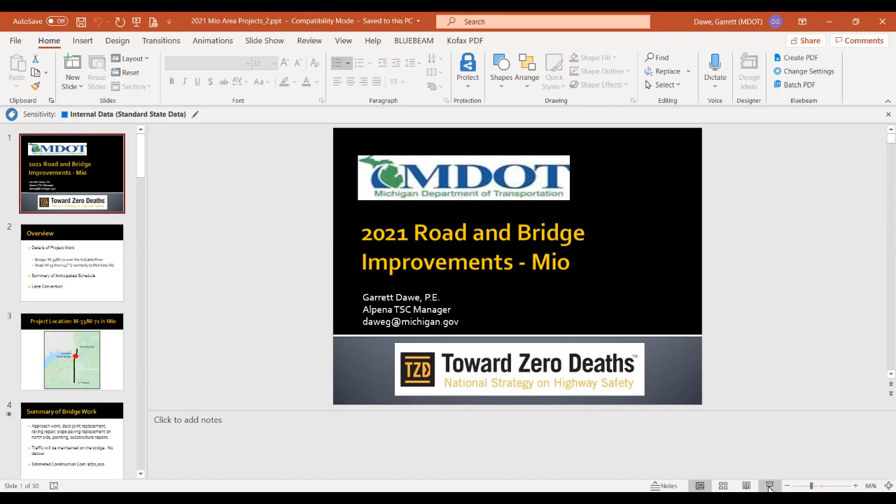Today's presentation is to give some information regarding a 2021 road and bridge improvement project in the Mio area. Again, I'm Garrett Dawe, the Alpena TSC manager. So here's an overview of today's presentation.

First and foremost, we'll go through some details of the project work. The bridge work is M33/M72 over the AuSable River. For the road work, we're talking about M33 from 14th Street at the south end of Mio, northerly to McKinley Road at the north end of Mio, which butts up to the project we completed in 2019 to the north. We'll also go over a summary of our anticipated schedule, and introduce a lane conversion concept we'd like to include in the project.

To highlight the project location, here's an overview map of the Mio area. The black line represents the limits of the road work, from 14th Street at the south end, northerly to McKinley Road. The red circle is the AuSable River Bridge where M33 goes over it.

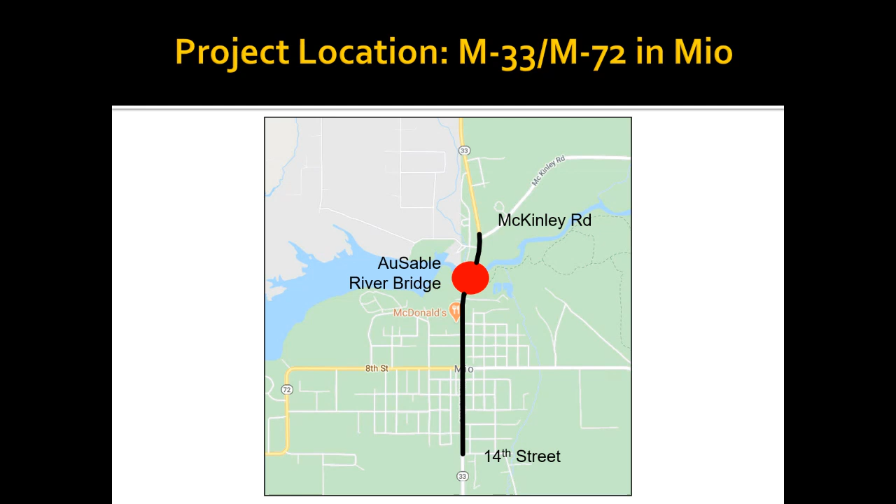We're going to start with the bridge work and give a summary of what MDOT will be doing on the bridge itself over the next year. I'll show some pictures of these things too, since some folks listening may not understand what some of these terms mean.

We'll be doing approach work - essentially concrete slabs on either side of the bridge deck on the road surface - deck joint replacements, railing repair, and some slope paving replacement. Slope paving refers to the concrete slabs underneath the bridge on either end that slope down towards the river. We'll replace that on the north side, paint the bridge underneath to help prevent rusting and deterioration, and perform some miscellaneous substructure repairs.

While we're working on the bridge, traffic will be maintained on the bridge, so we are not proposing a detour with this project. I'll get into more detail on what that traffic situation will look like. The estimated construction cost for this bridge work is $870,000.

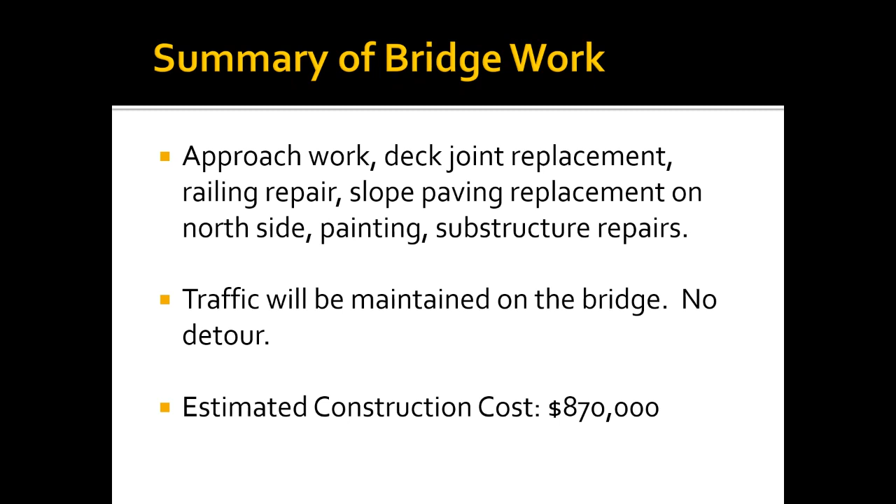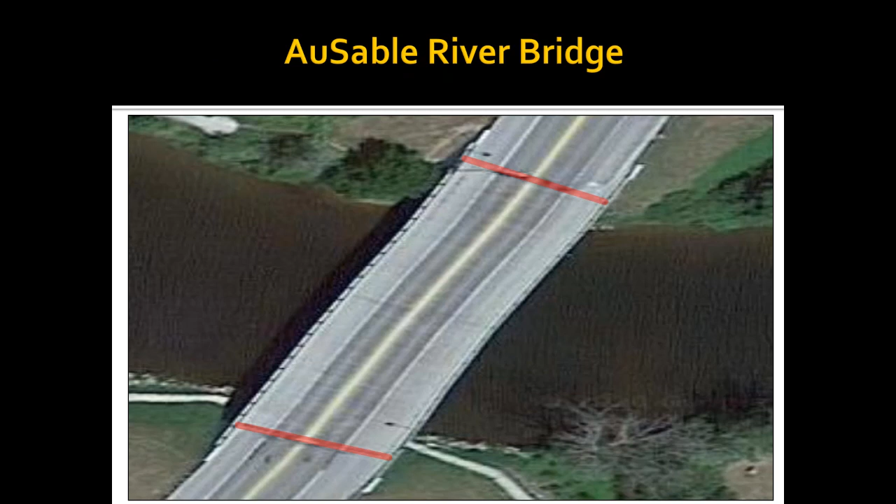Here's an aerial of the bridge over the AuSable River. Up on your screen is north, so Mio is off to the south, or the bottom of the screen. These red lines represent the deck joints. If you're familiar with, say, the Mackinac Bridge, and drive over those joints that look like fingers connecting - those are called expansion joints, and they allow the bridge to contract and expand with temperature without cracking or causing issues.

These joints will be replaced with the project, along with approach slabs leading up to the bridge. We don't have slabs there right now, but we're putting them in because they help, especially with heavier vehicles or trucks approaching the bridge. These slabs give them a chance to essentially settle down before they get onto the bridge deck, so they're not pounding on those joints or the bridge deck itself.

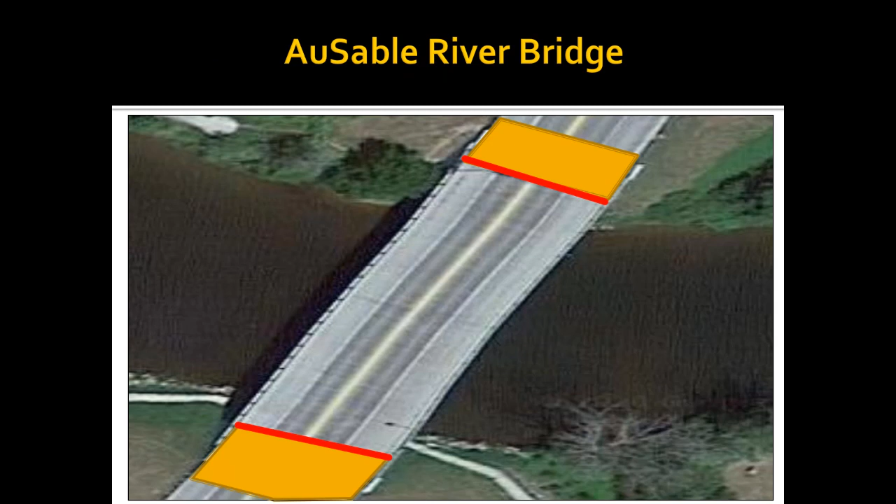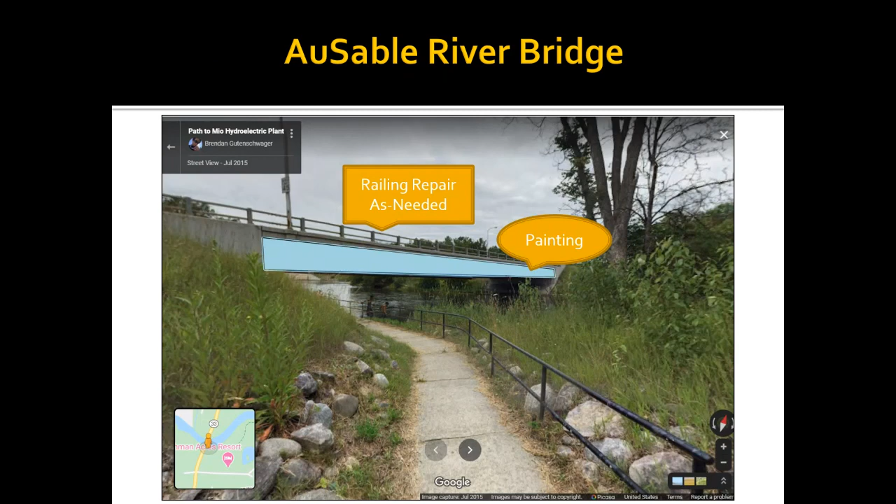Here's a picture of underneath the bridge, to give you an idea of some of the things we'll be doing. We will be repairing this railing as needed, so the whole thing won't be replaced, but any area that is damaged or deteriorating more than others will be repaired. We'll be painting the beams and other components beneath the bridge essentially the same color as it is now.

Again, that slope paving at the north side of the bridge, we'll be replacing, and putting back what we call heavy riprap - really boulders and bigger stones. Having that instead of the slope paving really helps us with scour around the bridge. If you picture the water moving along the bridge, it tends to erode less with the heavy riprap versus the slope paving.

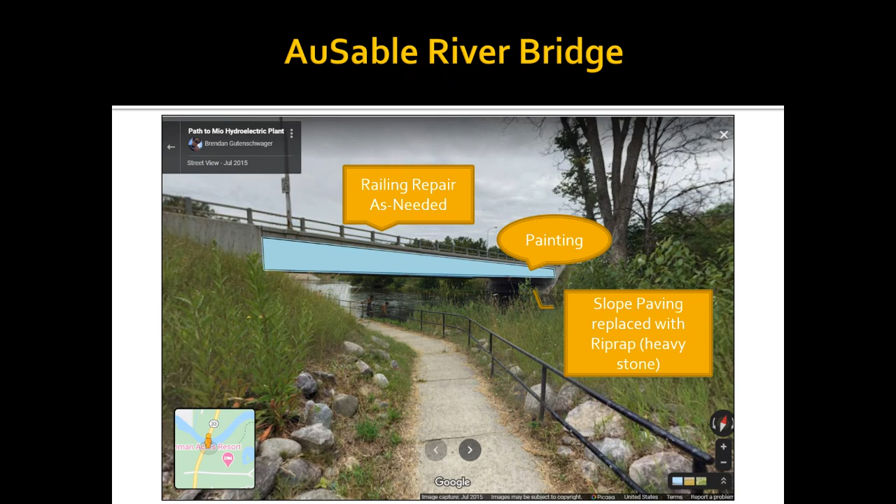Some substructure repairs are also needed. One thing I wanted to show - there's a pathway that goes under the south side of the bridge. Because of the work we're doing under there, it would not be safe for someone to walk underneath the bridge and through the work area. So we'll be closing this path on either end of the bridge during the project. Of course, the path will remain open up to the bridge itself for anyone interested in walking along it.

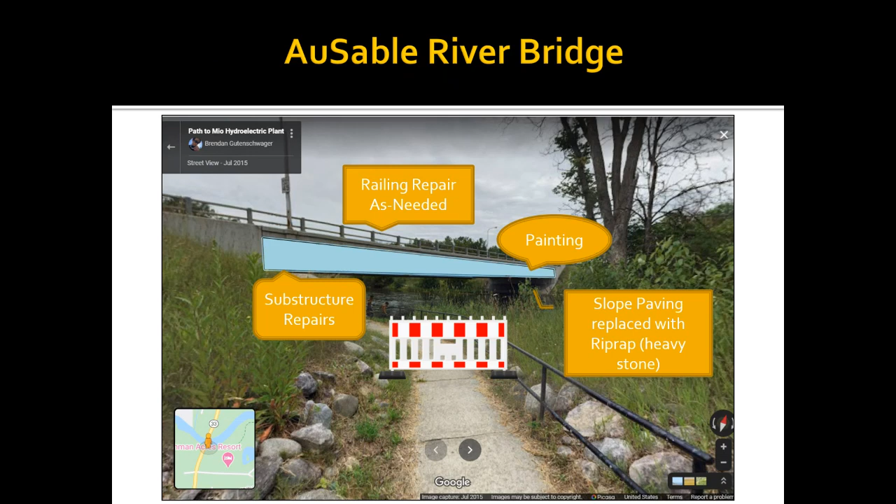So just detailing what the traffic setup will look like during the project. Beginning in late April through the end of June, you're going to see a single lane closure up top, with traffic maintained in one lane for both directions and alternated with temporary traffic signals on either end. This is a pretty common setup for a bridge lane closure. The side of the bridge that's closed will alternate, one side and then the other, to facilitate the work.

In the river itself, because of some of the work we're doing down there, it will necessitate closing off roughly half of the river stream to boating or other pedestrian traffic underneath. The channel will still be open, and we understand that the majority of river traffic is getting in just downstream of this location at the DNR park, so hopefully this wouldn't hamper anyone too much. The river will be open as well as the road.

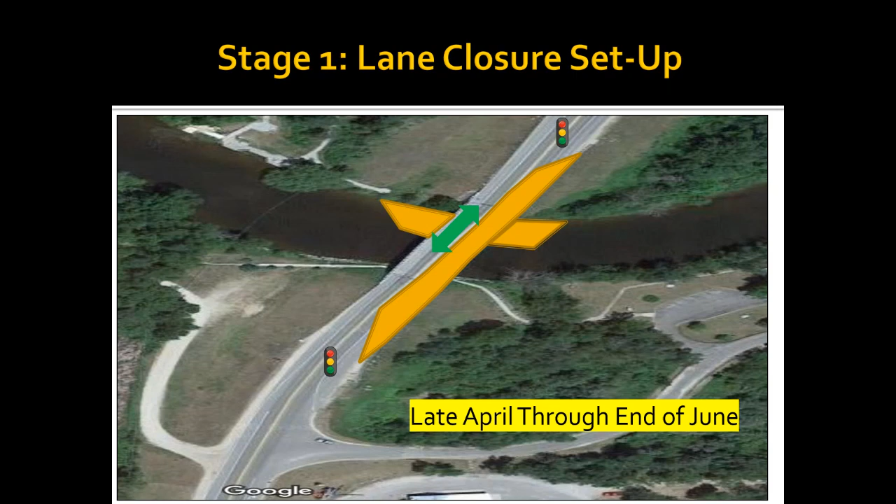The second stage of the bridge work will occur from the end of June through mid-July. All that's really required up top is a shoulder closure, which will still allow us to maintain one lane in each direction. So really very minimal impact to traffic from the beginning of July on. However, because the work underneath requires the shoulder closure essentially to park vehicles, we will still have the river closed part width, allowing traffic through, but not the whole width.

We will have all of the work done on the bridge and within the river before the canoe marathon weekend, which is the last full weekend in July, so folks either paddling in that race or watching it will not have to contend with construction.

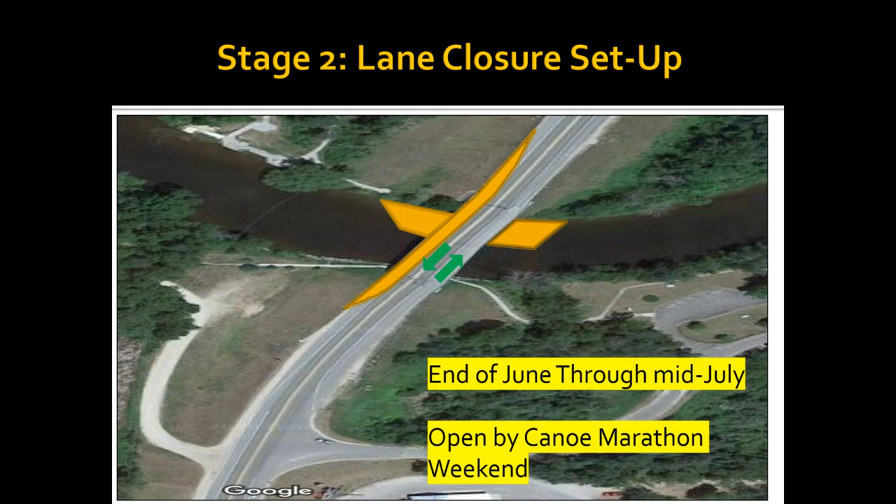Moving on to the road work, to reiterate, the limits of the road work are 14th Street at the south end northerly to McKinley Road. We have two different types of road work happening. In the M33 and M72 intersection area, we actually have concrete pavement, so we're not replacing the concrete, but essentially sawing out and resealing all of the concrete joints, and doing some minor pavement repairs in areas that have deteriorated faster than others.

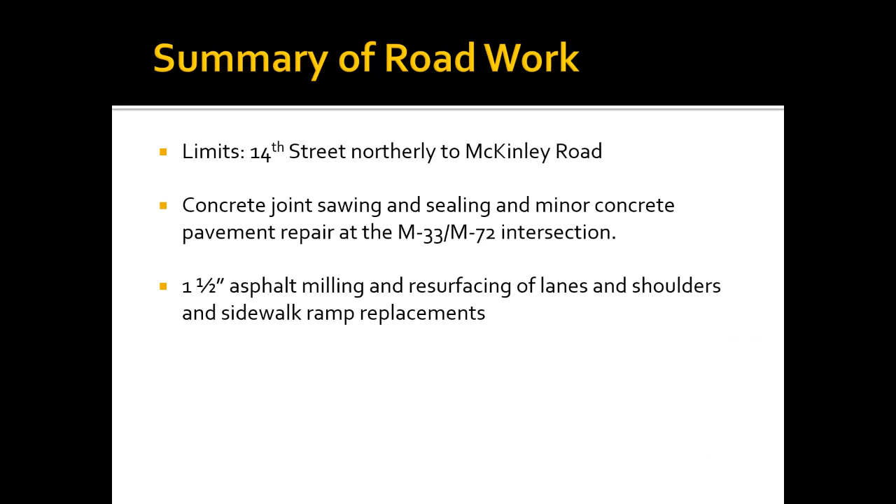For the rest of the road, which is asphalt pavement, we'll be doing a mill and fill, or mill and resurface, where we remove essentially an inch and a half of the top of the pavement and repave it back in, across the entire width of the road including lanes and shoulders. Along with that, we'll be replacing sidewalk ramps, which we're required to do when repaving a road as part of the Americans with Disabilities Act.

For the road work, traffic will be maintained on the road, again no detours, with intermittent lane and shoulder closures to facilitate that work. An estimated cost for the road work is $935,000. So all in all, between the two projects, we're right around $1.7 to $1.8 million—a substantial investment in the area.

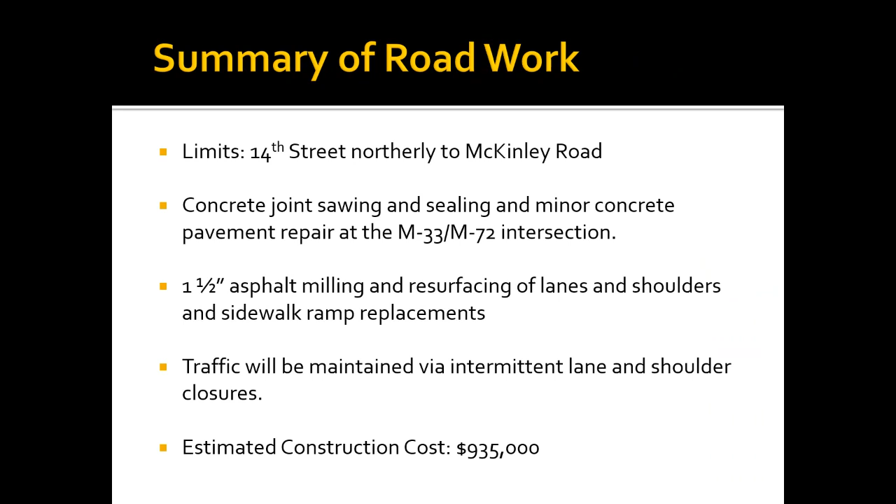I just wanted to detail a little bit the M33 and M72 concrete intersection. This is an overview, with north up on the screen. In that northeast quadrant, this is your Ace Hardware, and this is the real estate building.

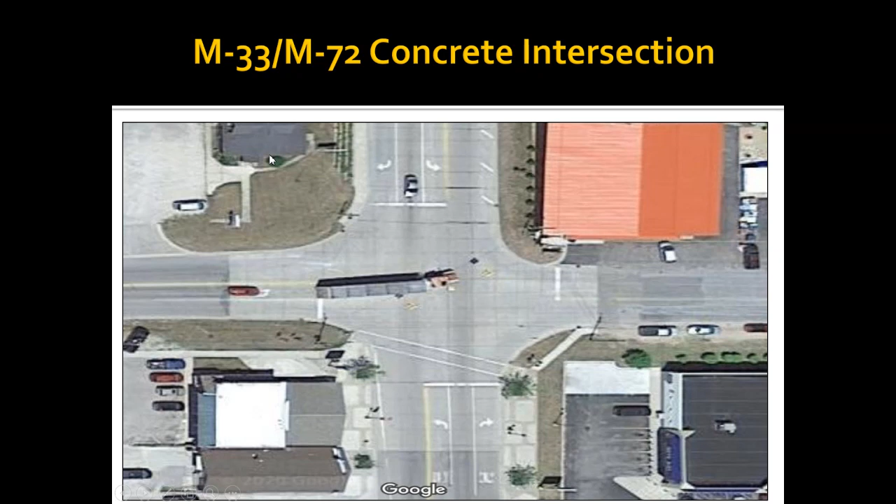This is an engineering drawing of the same view of the intersection. Again, up in the northeast quadrant, here's your Ace Hardware. All these pink lines represent every concrete joint within the intersection, giving you a picture of the scale of work needed. Concrete joint sealing, sawing and resealing isn't a lengthy operation, but given the number of joints here, it's going to be relatively significant. The blue on this drawing shows where we're looking at pavement repairs, which is a bit more substantial than just joints.

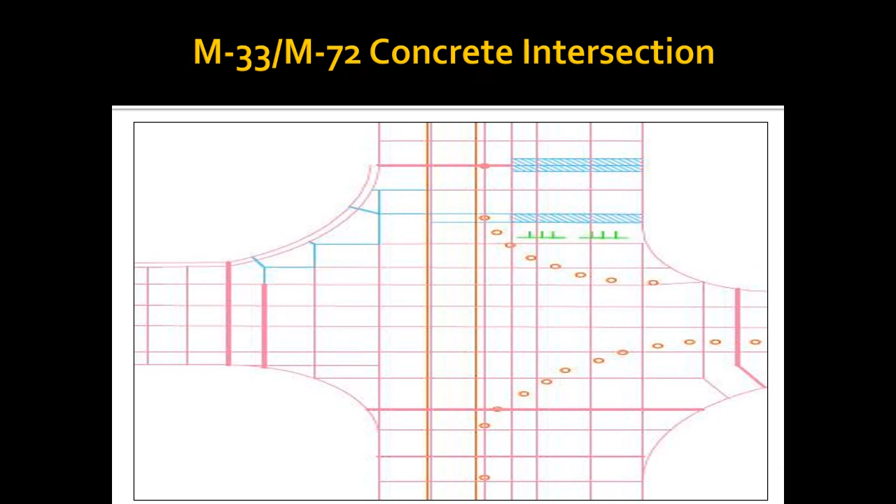We do have an existing traffic signal in the intersection, but in order to facilitate truck turning movements in this tighter area, we are proposing to turn that signal off and use portable temporary traffic signals set back a little further from the intersection, so traffic isn't sitting too close to it and trucks can make their turns.

The phasing of the traffic signal would be what we call split phasing. That's where all northbound traffic, including left turns, would go while southbound and eastbound are stopped. Once northbound is gone, all southbound would go, then once they're stopped, all eastbound would go. So it's a three-phase traffic signal cycle, whereas the existing cycle is a two-phase.

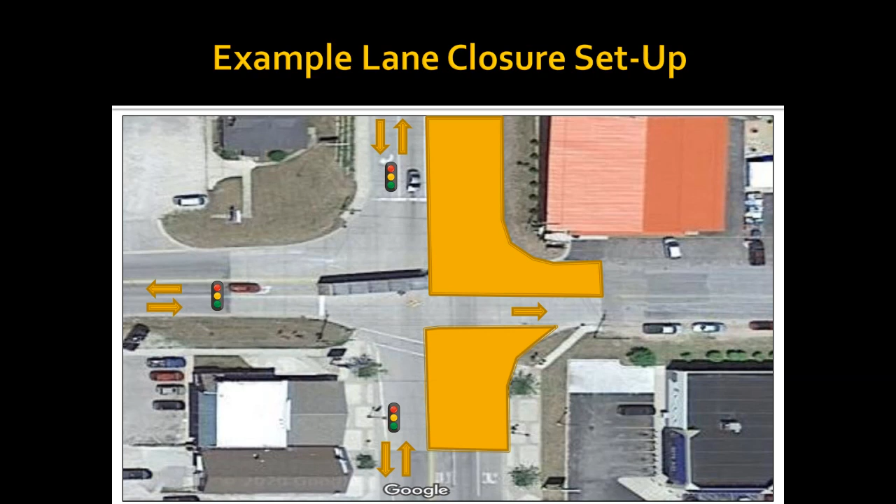This just shows the other side of the intersection and how traffic would be facilitated. It's pretty much the same situation, just everything flipped. Not every single lane closure setup we'll need is shown here, but this is essentially the strategy we're using.

All concrete work, not just within the intersection but just to the south and a little further north of the intersection, we are planning to complete before the Memorial Day weekend.

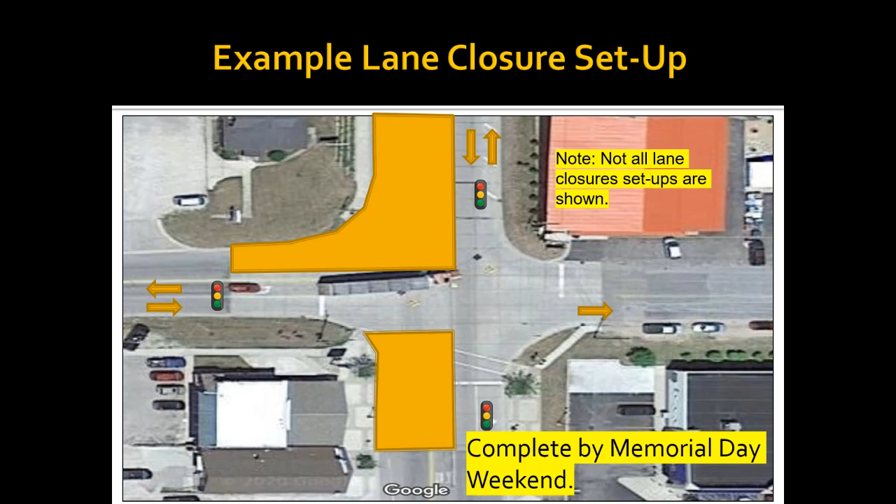Sidewalk ramp replacements, just to give you an idea of what we're talking about. When we say sidewalk ramps, we're referring to this area of the sidewalk. We need to make sure these grades are correct and the curb entrances are constructed so someone in a wheelchair or visually impaired can safely navigate these ramps.

So these are what we are going to be replacing. The rest of the sidewalk will remain untouched and as it is. We're only doing this at each cross street, so at driveways we would not be doing ramps.

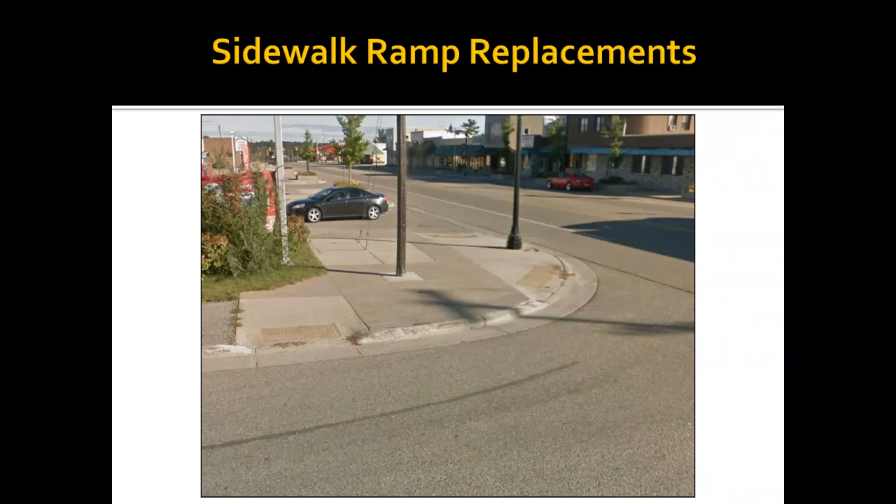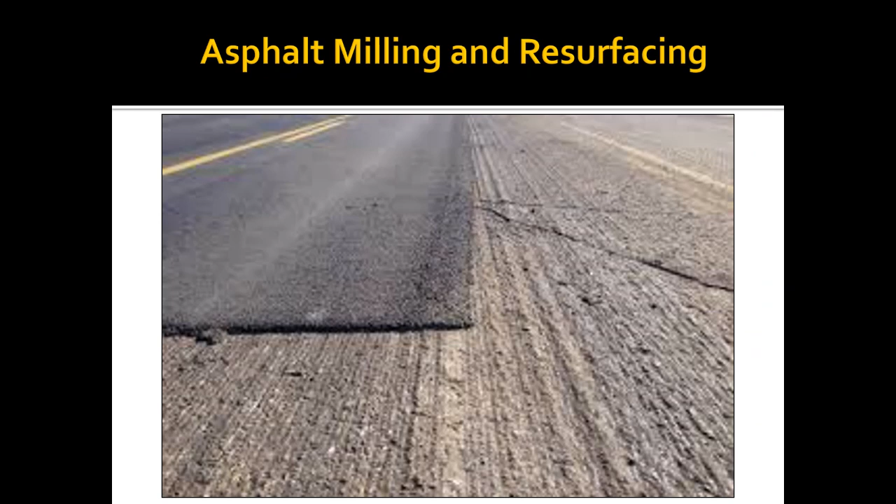This is just a picture of what we mean by an asphalt mill and resurface. Essentially just milling off that top layer of asphalt and repaving it back in.

So overall, the work schedule here. We're going to start the project as soon as we can in April. We say late April just to be conservative; it could be a little earlier.

Through the Memorial Day weekend, you're going to see bridge work starting over the AuSable River with one lane open, maintained with a temporary traffic signal. You're going to see the concrete intersection work going on down at M72, and you're going to see some sidewalk ramps being replaced.

These are some of the more impactful work types that can start to cause traffic delays. This is why we're starting them right off the bat and getting them done before Memorial Day weekend, the more intrusive stuff, so that we don't impede traffic too much.

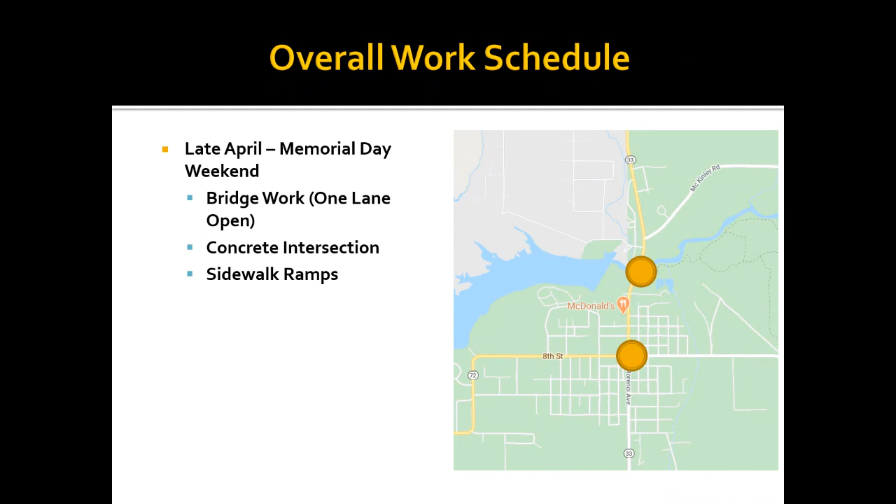After the Memorial Day weekend, and through what we're saying is June 25th, our current target date, the bridge work would continue as previously indicated, and we would begin asphalt resurfacing.

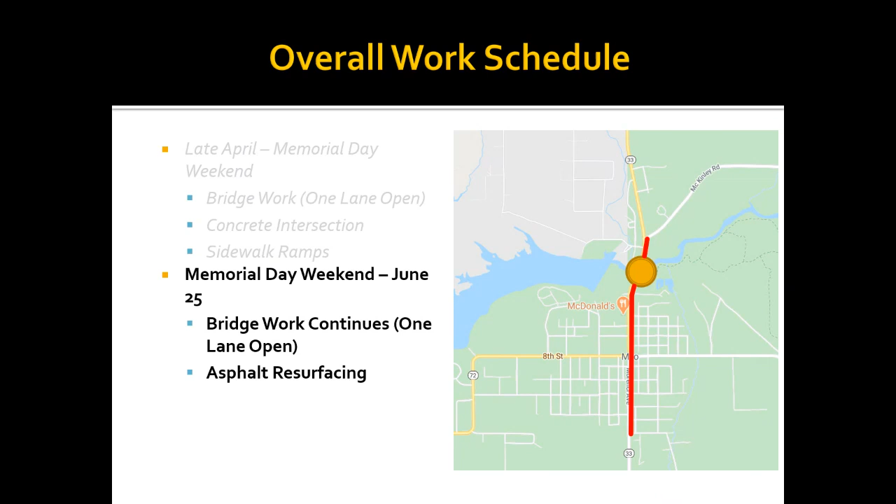This wouldn't be a constant lane closure for the asphalt resurfacing, only when we're out there working. We'd need lane closures under flag control, and then overnight when we're not working, everything would be open again and then closed again the next day as they move on. So again, this is primarily in the month of June.

Then the final stage starts from the July 4th holiday weekend, so everything would be open on July 4th on that heavy traffic weekend. After that, through July 23rd, we'd have that shoulder closure on the bridge with 2 lanes open, 1 in each direction, completed by July 23rd and ready for the canoe marathon weekend.

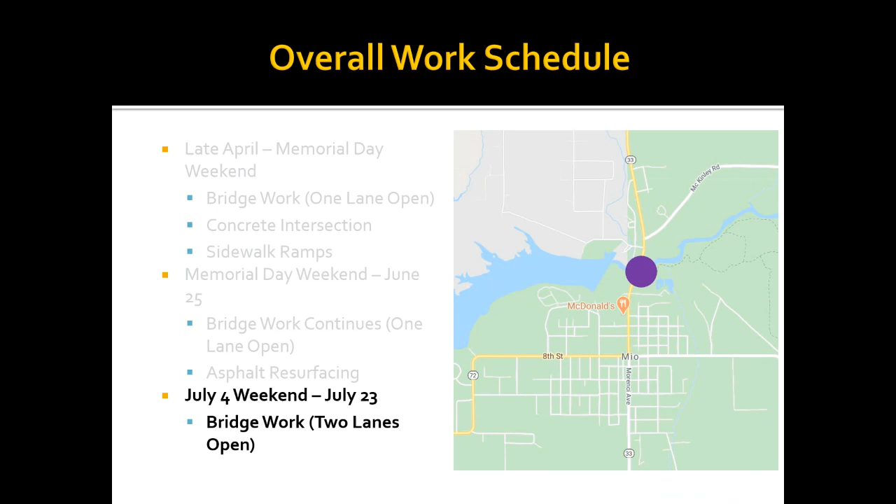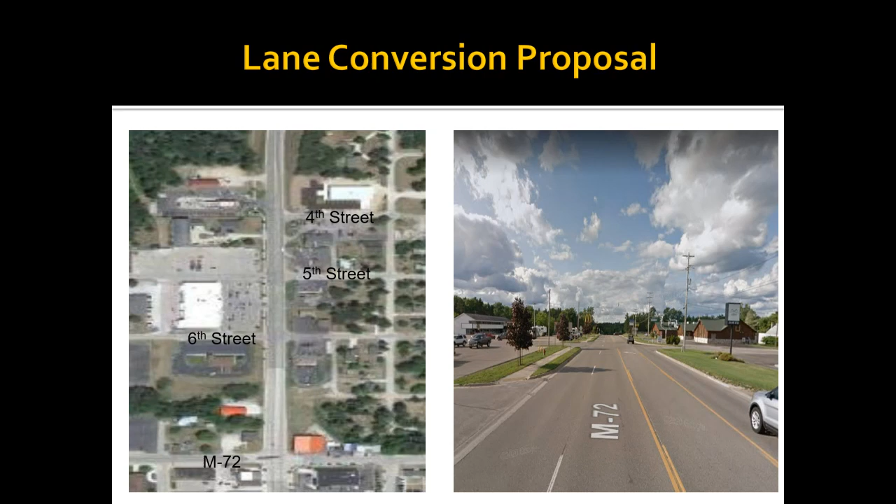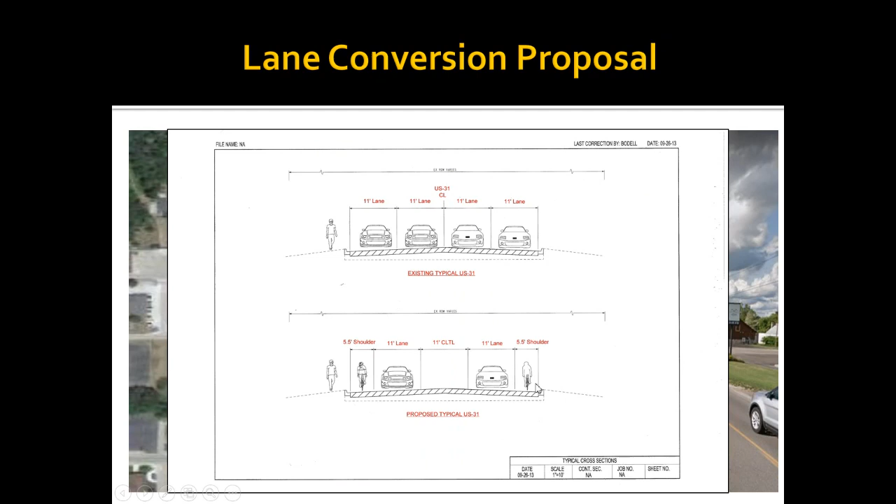It can also be utilized by pedestrians if the sidewalk is not open, say in the winter if it hasn't been plowed. From what I understand, folks tend to walk out in the road in those situations. This provides them a safe area to do so, and Amish buggies, that kind of thing. It keeps those non-motorized users out of the through lanes.

So what are some benefits of this layout versus what we currently have? First of all, it simplifies the roadway operations. You get a more orderly driving pattern through the area, less weaving especially in that southbound direction, less lane changing, slowdowns, startups, that kind of thing. It's a much more orderly operation.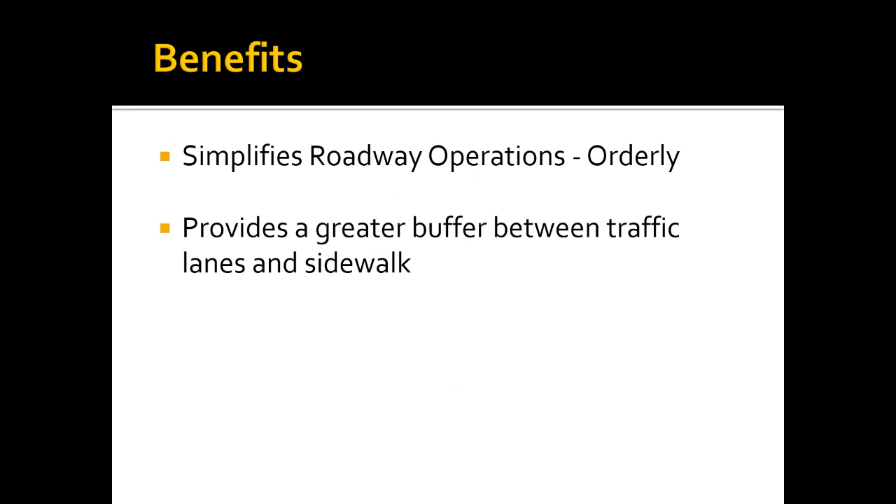As I indicated before, it provides a good buffer space between traffic lanes, and there's a sidewalk on the southbound side, so you increase that space between vehicles and folks walking. It also provides a dedicated area for bicyclists or other non-motorized users that don't want to use the sidewalk, or aren't allowed to and have to be in the roadway.

It also results in an improved turning radius for right-turning trucks and campers. If you think about the southbound direction, anyone turning right, say into the Family Fare, is right up against the curb currently, and making that turn can be difficult at times. By doing the lane conversion, you move the edge line further away from the curb and give them more room to better make that turn, and in many cases get off the roadway a little quicker, so they're not holding folks up behind them.

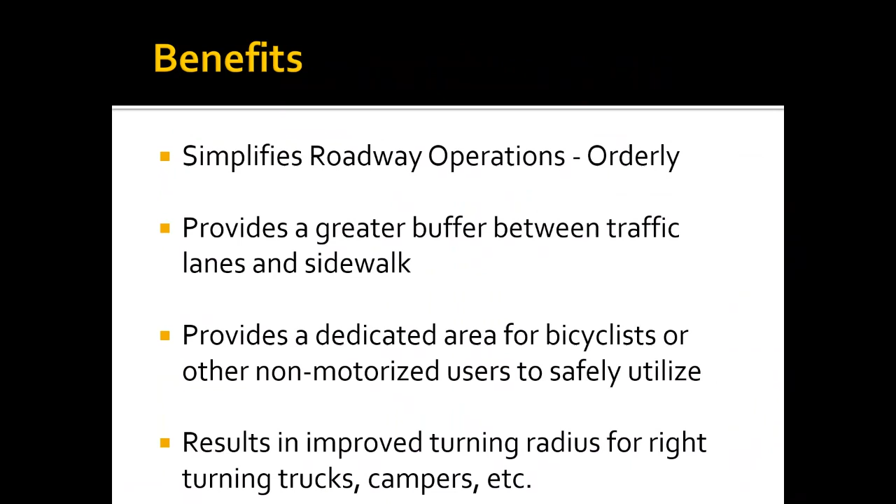Again, an overview from the sky looking down of what we're talking about. This picture on the left is not an exact representation of what we have - this lane here is currently a center left turn lane. We'd be converting this setup to this one on the right, with the center left turn lane right in the middle, 1 lane in each direction, and then two paved shoulders on either side as well.

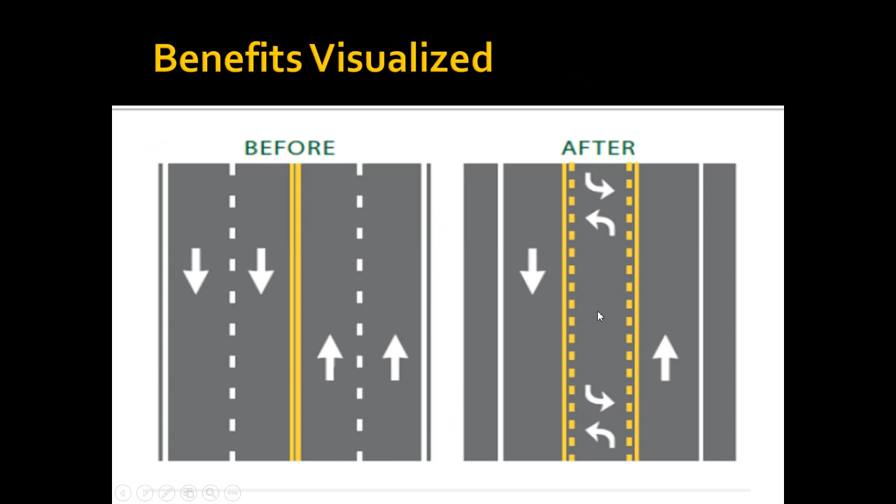So, some additional benefits. Generally, when we do these conversions, and we've done them all over the state, including in northern Michigan, we see what we call traffic calming. That lead vehicle controls the speed of vehicles behind them, so we generally see a downtick in travel speeds on the roadway, which for folks entering a town such as Mio is a good thing.

It enhances safety. We see crash mitigations or crash reductions as a result of this, and in this case I think we're being very proactive. With one lane in each direction instead of two, you reduce your sideswipe opportunities, and you actually reduce angle or T-bone type crashes. Because of the safe havens and increased buffer space created for pedestrians and bicyclists, you reduce those crash types as well.

It's easier to cross a 3-lane roadway than a 4-lane roadway for a pedestrian or bicyclist, so that's another advantage. And for folks turning either onto the road or turning left across another lane, it's easier to judge your vehicle gaps when you're not having to look and judge two lanes instead of one. I'll show a couple pictures of this.

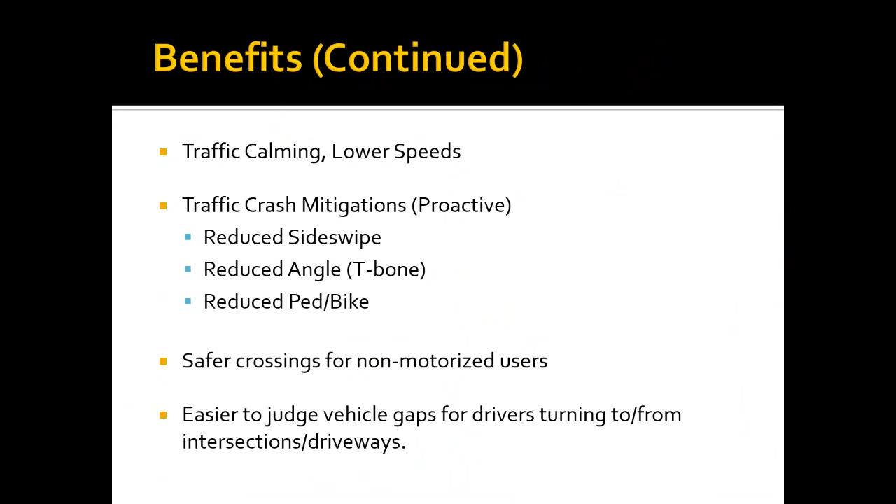So this is what I mean by easier to judge your gaps. The picture on the left shows a vehicle trying to turn left across two lanes of traffic. We've probably all seen this: a vehicle is coming and sees this driver trying to turn left, so they might slow down or stop, whereas the vehicle in the other lane doesn't know what's happening, and you end up with a crash.

By converting the roadway to a 3-lane, that situation wouldn't occur. If this vehicle did happen to stop and wave this person across, there's not somebody coming in another lane that could potentially hit them. Of course, that's not an operation we would encourage - this vehicle should continue through because they have the right of way. But this just depicts the sight lines turning vehicles have and the improvements from doing a road diet or lane conversion.

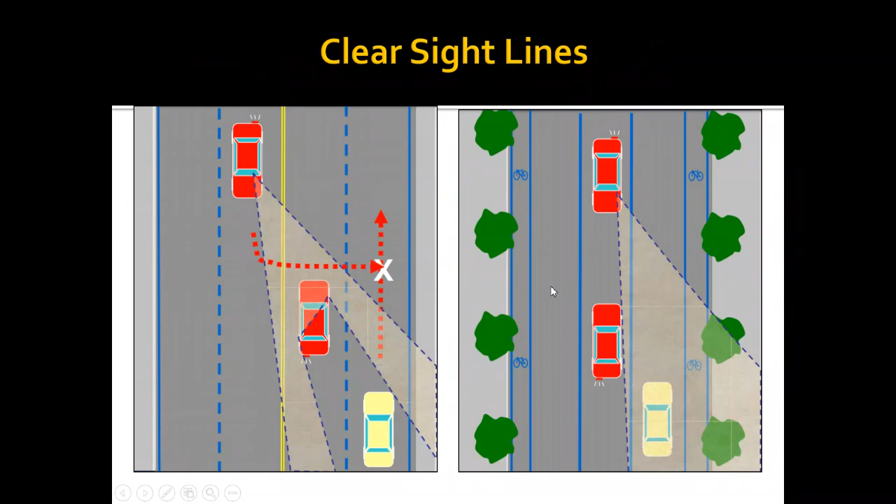Some non-benefits, there are a couple. Right turning movements - the turning radius is improved, but in the southbound direction in particular, on a busy day, if someone is turning right, a vehicle directly behind them would probably have to slow down a bit until they complete that movement, whereas currently you could potentially pass that vehicle or get around them. But again, it's a right turn, they're pretty unimpeded, and we think the inconvenience certainly doesn't outweigh all the benefits we've described.

And for that 4-block length in the southbound direction, this lane conversion would take away passing opportunities through town. But again, generally when folks are coming into a town such as Mio, we want them to drive a bit slower and a little more carefully, so this could actually be perceived as a benefit.

I wanted to go through a quick crash summary of the last 5 years on this stretch of roadway. Over the last 5 years, the stretch from M72 up to a little north of 4th Street, the area we're looking at converting, has seen 18 total crashes. This isn't a significant number of crashes or a high number, but we have had 2 serious injuries resulting from that, which I do consider significant.

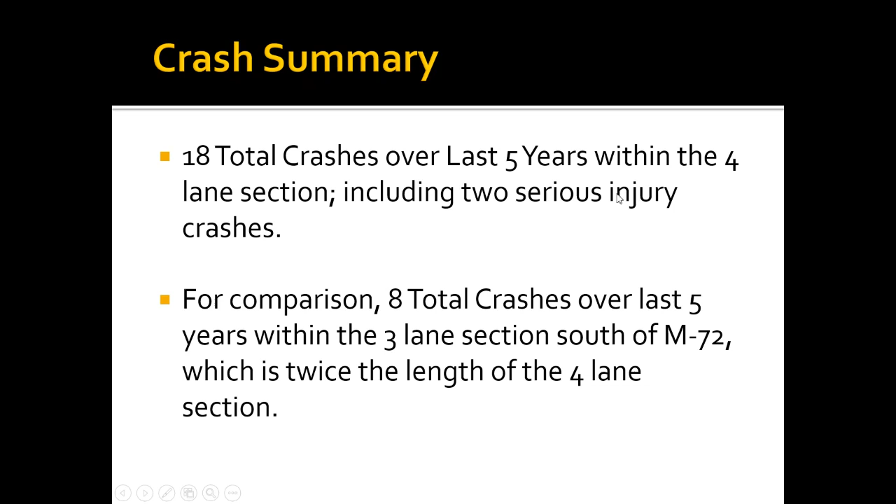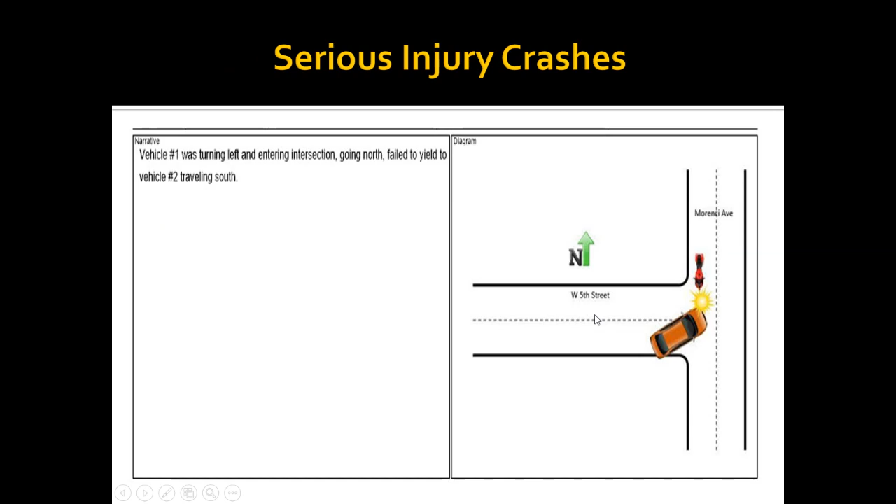There are 2 southbound lanes currently, so this vehicle is having to judge not just 1 lane, but potentially 3 or 4 lanes because they're turning left. With the proposed lane conversion, they're only looking at 1 lane in each direction, making it much more likely they'll see whatever vehicles are heading their way and judge their gaps correctly. This type of crash would be mitigated by the lane conversion.

The other crash was a pedestrian crash, just south of 4th Street. A pedestrian pushing a stroller with a small child was trying to cross the road from west to east and made it a little over halfway when they were struck by a vehicle. The stroller was not struck, but the person pushing it was struck and seriously injured. That crash would also be mitigated because a pedestrian would only be crossing 3 lanes of traffic versus 4 — less to judge, less opportunity for a mistake, resulting in a safer road.

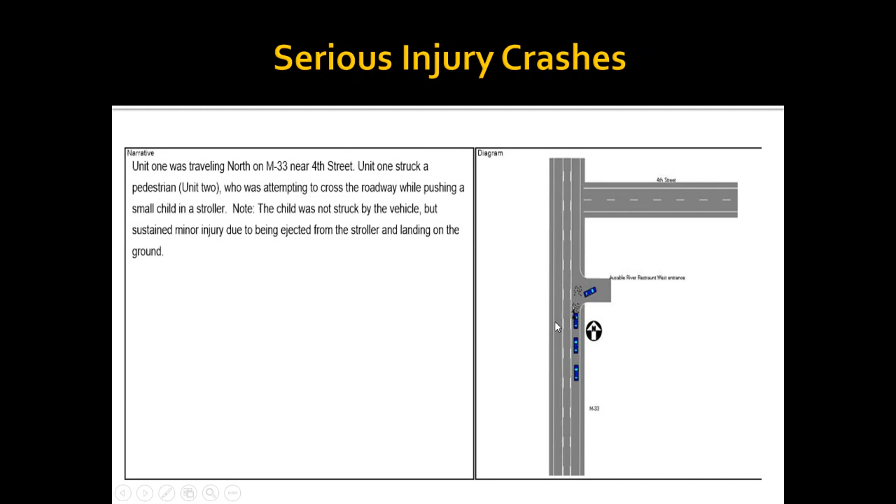Anytime you do a lane conversion, the initial concern is usually that you're taking away a through lane and will create congestion with backups. So I'll play a couple of videos: the one on the left is a simulation of our current condition, and the one on the right is a simulation of the proposed condition.

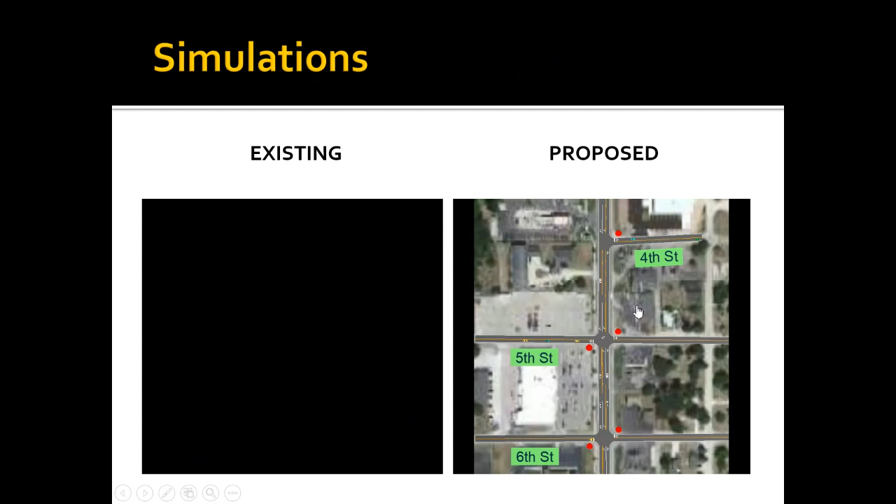This is between 4th and 6th Streets — the Family Fare is right here, and McDonald's is right off the top of the screen. It's apparent that the video on the right is very hard to decipher from the video on the left. We're not seeing significant congestion, stopped traffic, or backups of any kind. This is with traffic data from a weekday in July, a relatively high time of year for traffic, and even then we're not seeing any issue with congestion. That's a positive sign.

I also wanted to share a simulation of the M72 intersection, at the south end of the proposed lane conversion. We're not seeing a lot of backups, and in fact this intersection wouldn't change at all. The only change is in the southbound direction approaching M72: instead of the rightmost lane ending at the intersection and forcing vehicles to turn, they would come in one lane and then that lane would open up, with a right turn lane still provided. So the traffic signal timing and interaction of vehicles within the intersection should not change at all as a result — another positive.

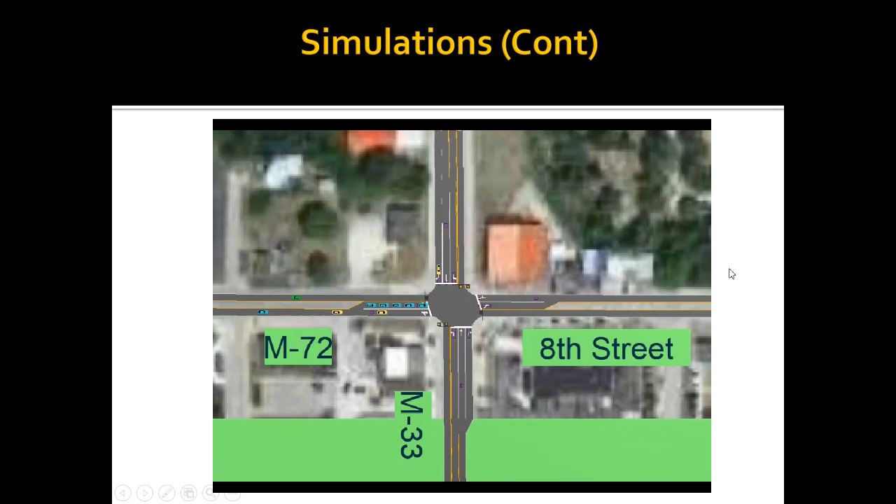I'll just let this simulation play out. Great — and that concludes the presentation.